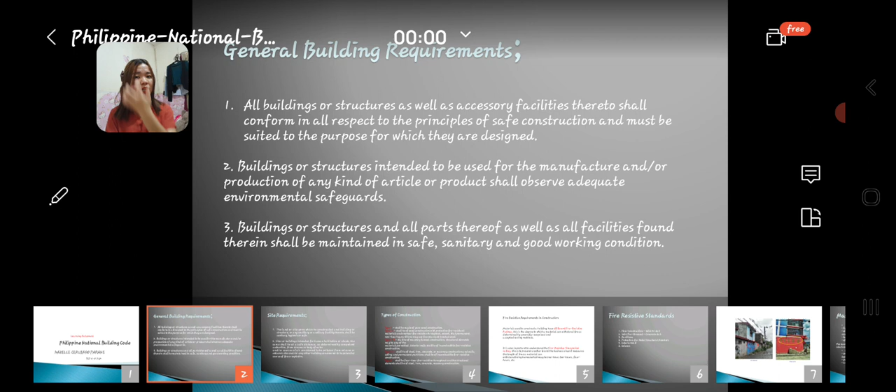Next is site requirements. Sa site requirements, dito pag-uusapan yung lupa na pagtatayuan ng isang building. The land or site upon which is constructed the building or structure or any ancillary or auxiliary facilities thereto shall be sanitary, hygienic, or safe. So dapat yung land or yung site niya is safe and naka-sanitary siya.

Sites for buildings intended for human habitation or abode shall be at a safe distance, as determined by competent authorities, from streams, body of water, or sources of air pollution, or from volcanoes or volcanic sites or any other building considered to be a potential source of fire or explosion.

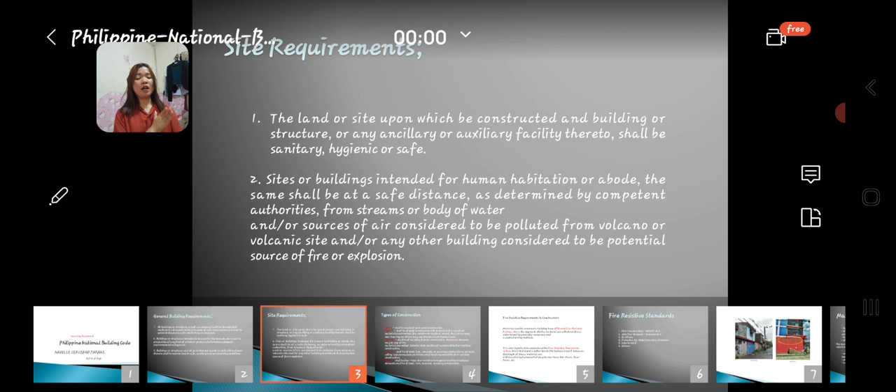So dapat yung magiging land mo or pagtatayuan mo ng isang building dapat ay malayo siya sa disgrasya, halimbawa, hindi siya dapat sa isang lugar na pag lumindol ay magbibiyak yung lupa. So dapat is safe talaga siya at maayos.

Next is types of construction. May type nga ang construction. Type 1 shall be made from pure wood construction. Kasi pag sinabi natin pure wood, matibay, so matibay talaga siya.

Next shall be wood construction with protective fire-resistant materials and 1-hour fire resistive throughout, except the permanent, non-bearing partition, which may use fire-retardant treated wood.

Next shall be masonry, wood construction. Constructional elements may be any of the materials permitted. Exterior walls will be of incombustible, fire-resistive construction. Next shall be steel, iron, concrete, or any masonry construction; walls, ceiling, or permanent partitions shall be of incombustible or fire-resistive construction. The next shall be 4-hour fire-resistive throughout all structural elements, which shall be steel, iron, concrete, or masonry construction.

Dito, papasok, dapat yung gagamitin mo ay matibay. Hindi pwedeng gumamit ka lang ng isang bagay o gagamitin sa isang building na hindi siya matibay. Dito papasok yung mga masonry, yung iron, yung concrete.

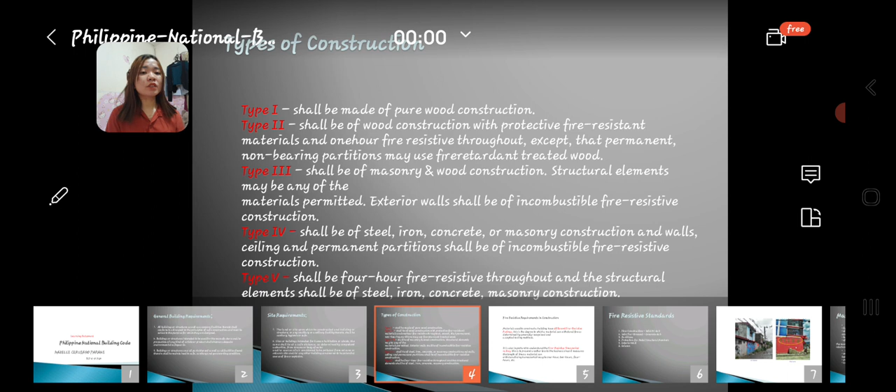Next, fire-resistive requirements in construction. Materials used in constructing buildings have different fire-resistive ratings. This is the degree to which a material can withstand fire, as determined by generally recognized and accepted testing methods.

Dito papasok yung tinatawag na different fire-resistive ratings. Dito mo ma-determine o makikita o ma-recognize kung gaano ba talaga ka-accept yung isang bagay na gagamitin mo. So it means meron siyang tinatawag na accepted testing, ito-testing mo muna yung isang gagamitin mo kung matibay talaga siya.

Next, it is also important to understand the fire-resistive time period rating. This is to prevent further loss to the business since it measures the length of time a material can withstand being burned, by 1 hour, 2 hours, 4 hours, or etc.

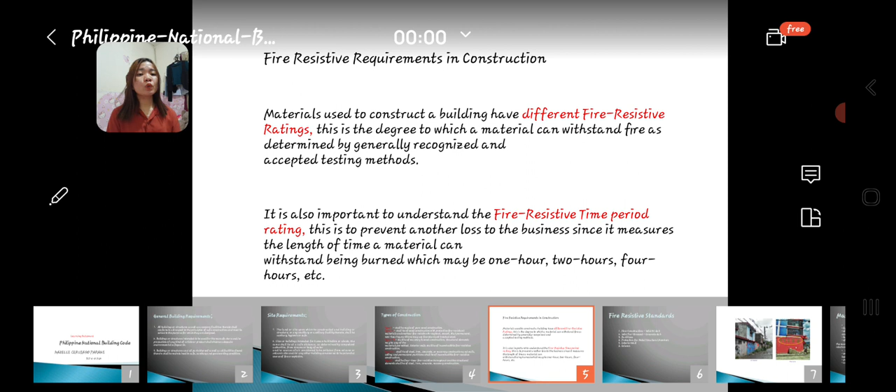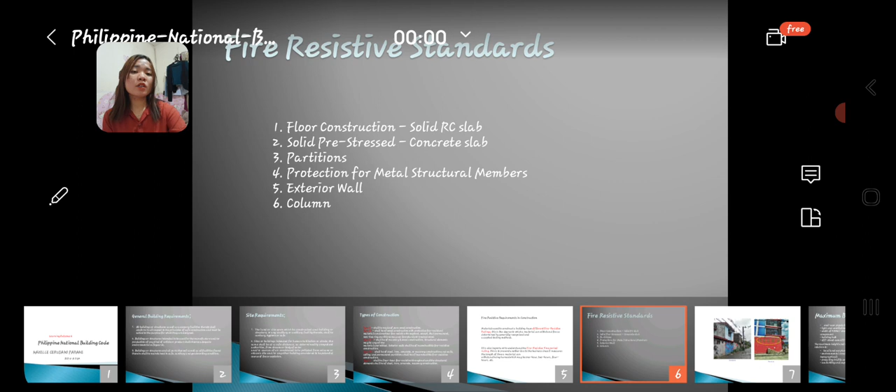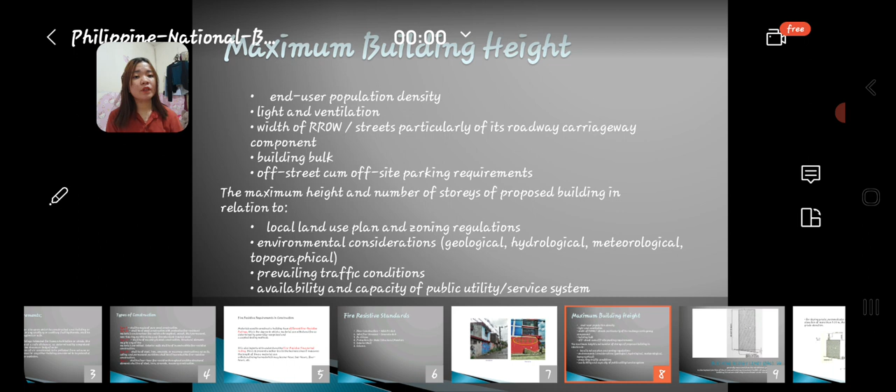For example, the building height limit. Next, for example, for sloping grade perpendicular to RROW with the difference in elevation of more than 3.00 m and the average grade level established grade elevation.

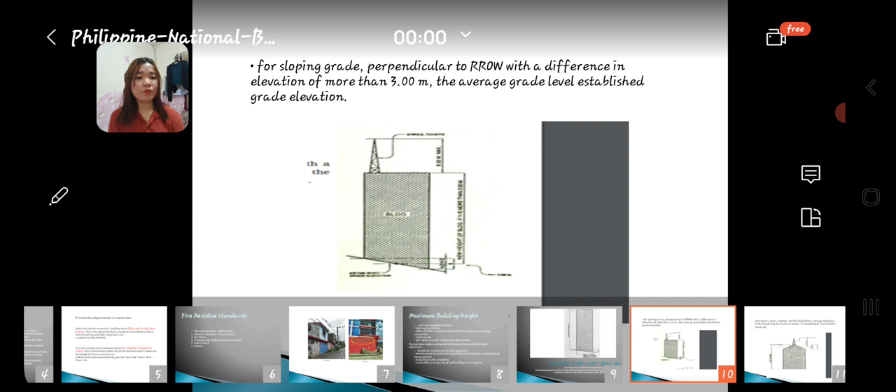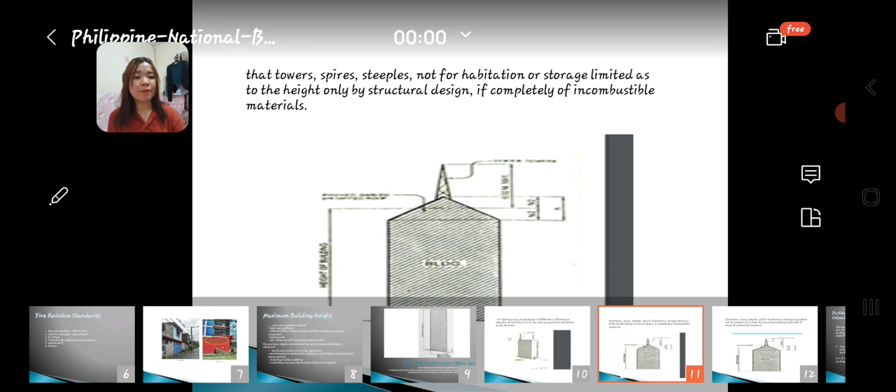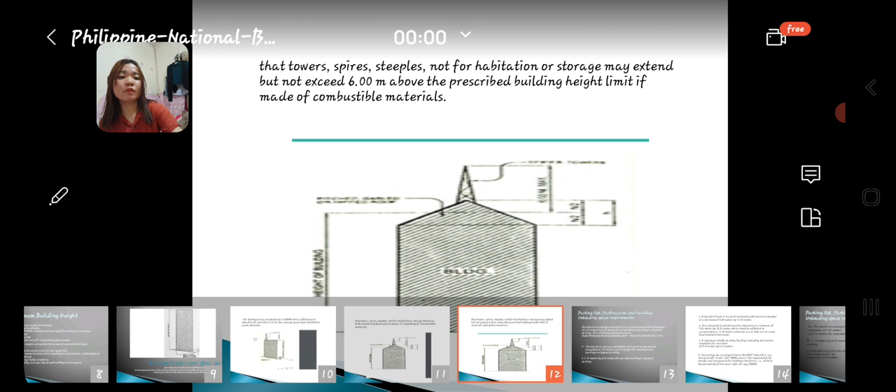Our next is the parking slot, parking area, and loading and unloading space requirements. So of course, if you're really building a building, you should have a parking slot. The size of an average automobile car parking slot must be computed at 2.50 meters by 5 meters for perpendicular parking or diagonal parking. For reference, please check Philippine National Building Code 2005, Rule VII, Section 707, 4-b.

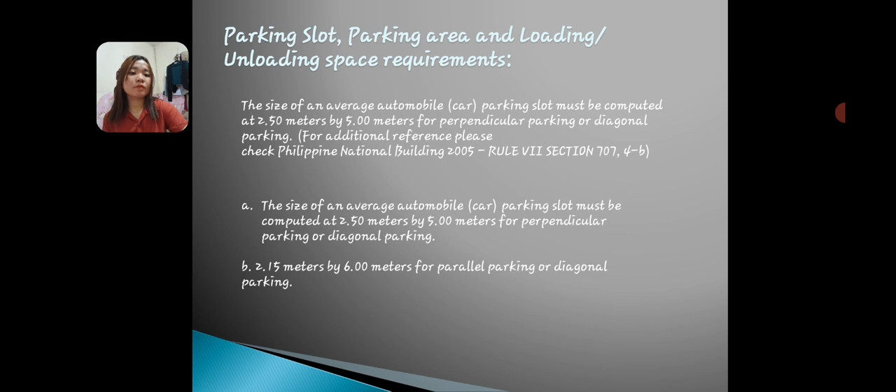Next is standard truck space parking loading slot must be computed at a minimum 3.6 meters by 12 meters. That's the standard for trucks. An articulated truck slot must be computed at a minimum 3.6 meters by 18 meters, which should be sufficient to accommodate a 12 meter container van or bulk carrier at full length. So it's not consistent when it comes to the meters.

When we talk about jeepney or shuttle parking, loading and unloading must be computed at a minimum of 3 meters by 9 meters. So each vehicle type has its own measurement.

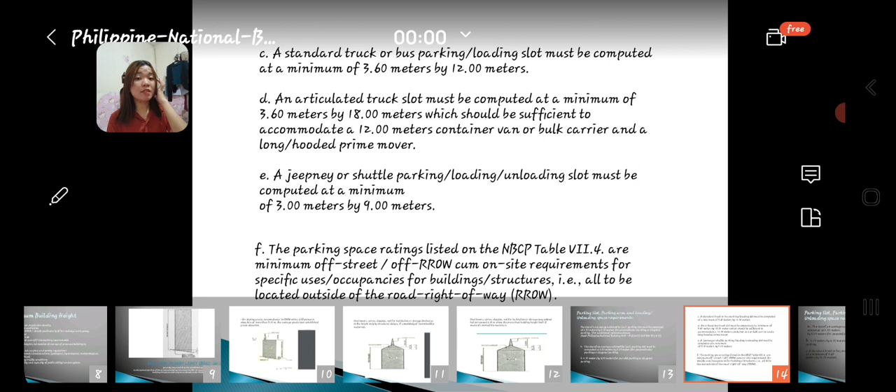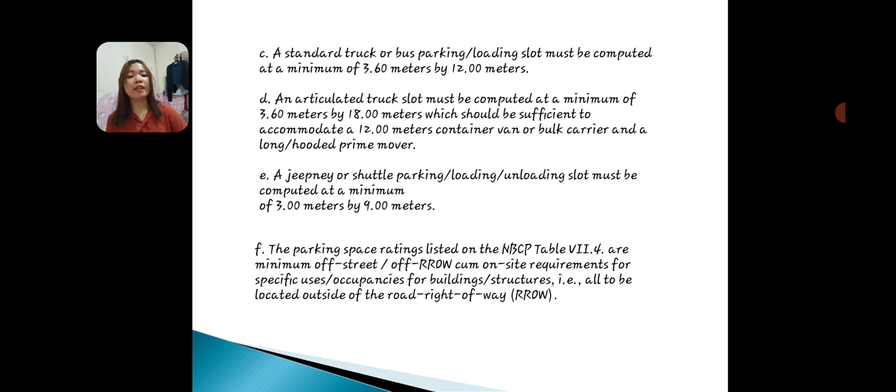F is parking space ratings listed at NBCP Table VII.4. Parking space ratings listed at NBCP Table VII.4 are minimum off-street off-RROW cum on-site requirements for specific uses, occupancies, and building structures, all located outside of the road right of way. Parking slot, parking area, and loading unloading space requirements, so it has its own requirements.

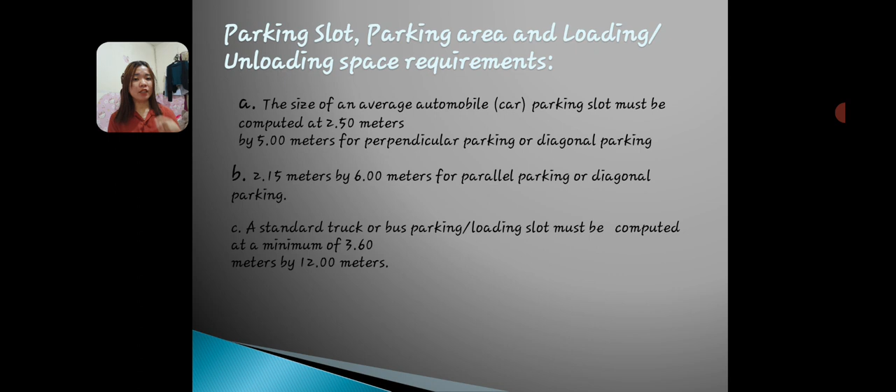Next. That's it as well. So, minimum required off-street off-RROW cum on-site parking slot, parking area, loading and unloading space requirements by allowed use occupancy. There's a measurement for every 1,000 square meters of gross floor area: provide 1 car slot. So it's explained here that for every 1,000 square meters, there's 1 car slot, or 1 bus if it's only 100.

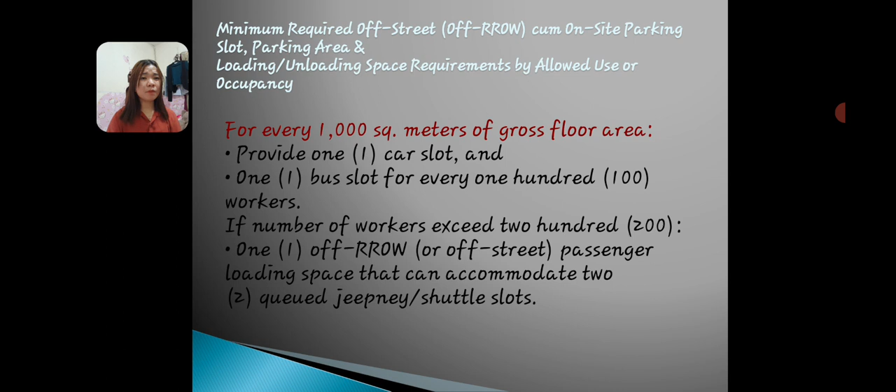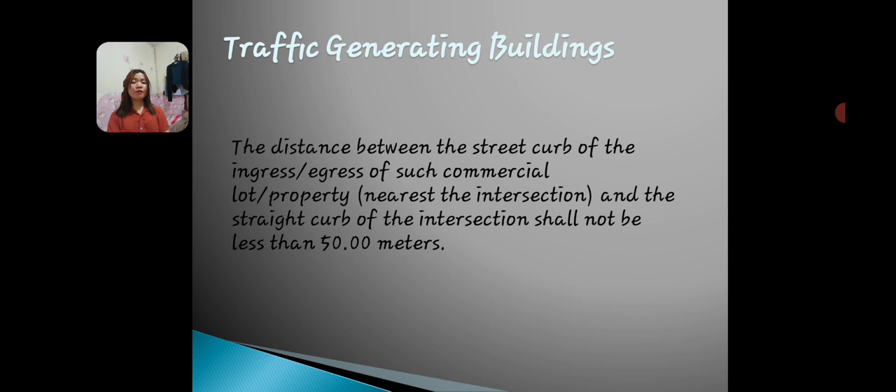Next is traffic generating buildings. The distance between the street curb of the egress of the commercial lot property nearest intersection and the street curb of the intersection should not be less than 50 meters. That's about traffic, so that's the example for it.

Next is light and ventilation. Kung meron tayong tinatawag na light and ventilation: no building shall be altered or arranged so as to reduce the size of any room or the relative area of windows to less than that provided for buildings under this rule, or to create an additional room, unless the additional room conforms to the requirements of the rule.

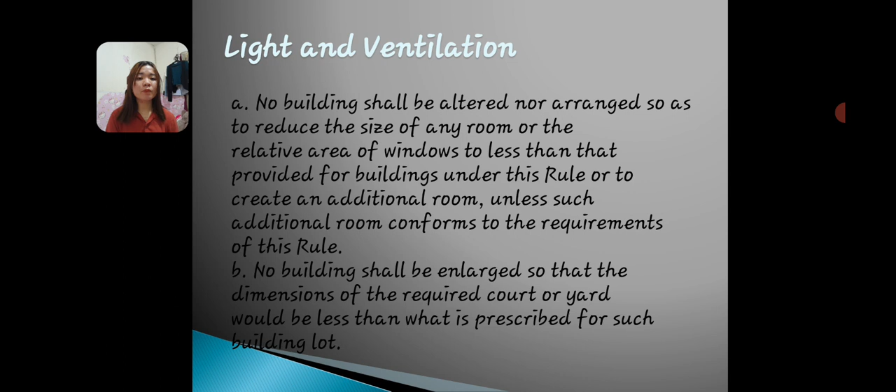So kapag sinabi natin light and ventilation, may room din, pasok din siya sa rules. No building shall be enlarged so that the dimension of the required court or yard will be less than the prescribed minimum for a building lot.

Next is size and dimensions, so may size and dimension din siya. Dito papasok yung minimum size of courts and yards, at ang kanilang least dimension shall be governed by the use, type of construction, and the height of the building, provided that the minimum horizontal dimension of the said court or yard shall not be less than 2 meters.

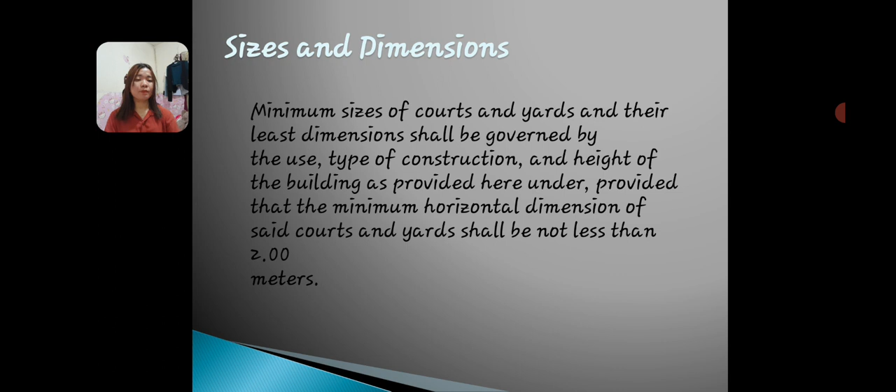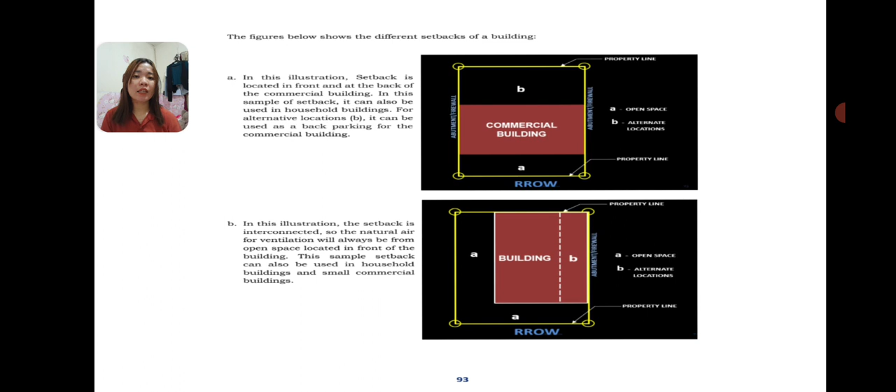Ayan, for example niya. Dito makikita natin yung commercial building. Ito ay nag-iilustrate ng setback na located sa front at sa likod ng commercial building, sample ng setback. Pwede rin itong gamitin bilang household building for alternative location, o magamit bilang back parking for the commercial building.

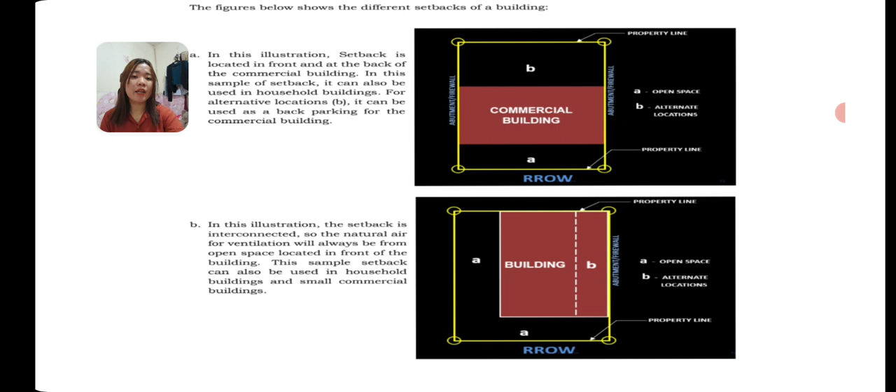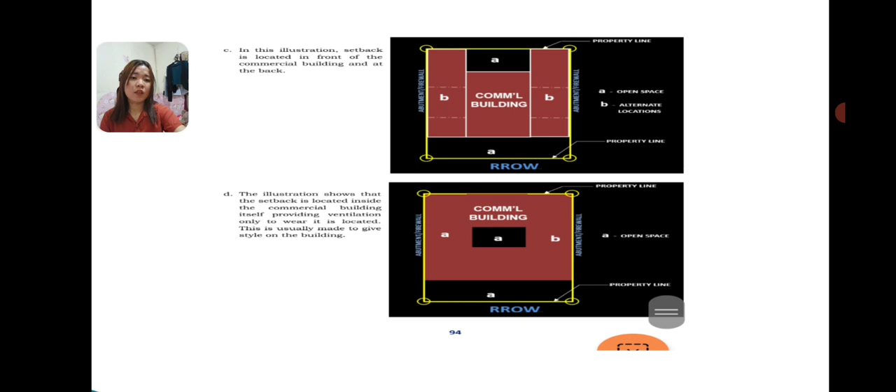Next is setback B, parehas lang din siya. Ang sample setback na ito ay pwede ring gamitin sa household building. Next, ito yung susunod na example, parehas lang din siya, pinaka-example dito yung sa mall, sa mall ng Cubao.

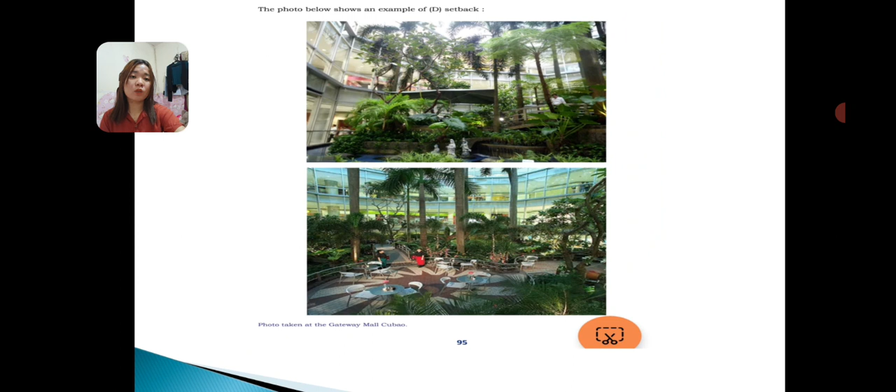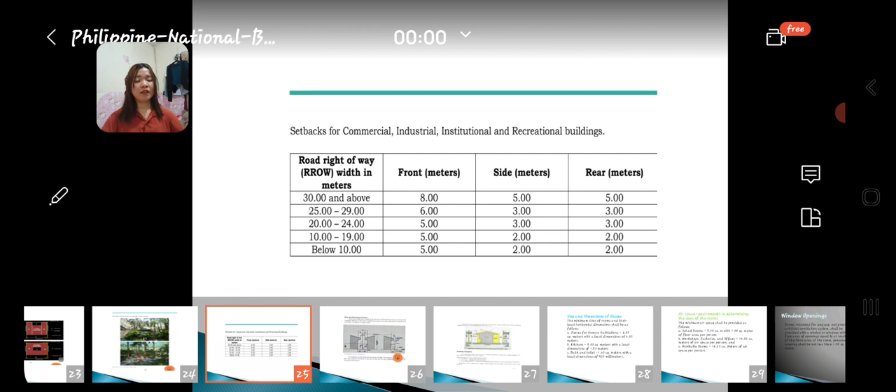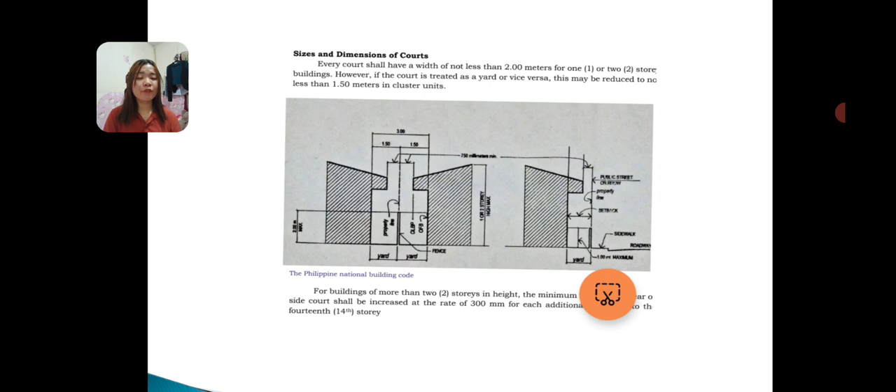Next, for example, size and dimension ng courts. Ito yung example ng dimension courts: every court shall have a width of not less than 2 meters for 1 or 2 story buildings. However, if the court is treated as a yard or vice versa, this means it can be reduced to no less than 1.50 meters for cluster units.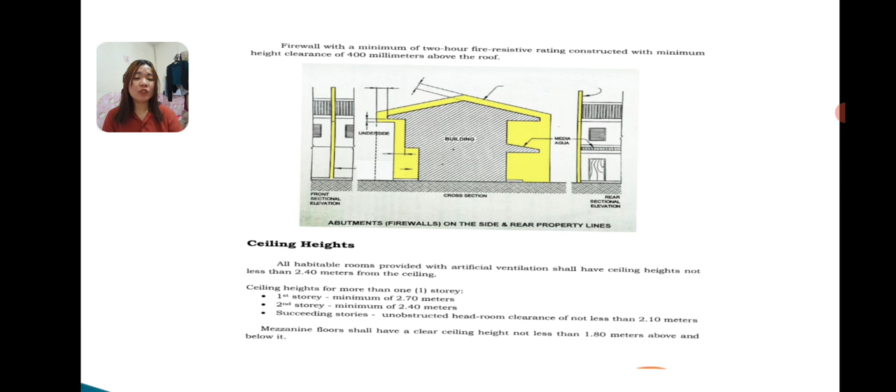Next, ito naman, ceiling heights, kung gaano lang kataas yung ceiling niya. Dito makikita mo, habitable rooms provided with artificial ventilation shall have ceiling heights not less than 2.40 meters. If the ceiling height is more than 1 story, first story minimum 2.70 meters, second story naman minimum 2.40 meters. Succeeding stories naman, unobstructed headroom clearance of not less than 2.10 meters.

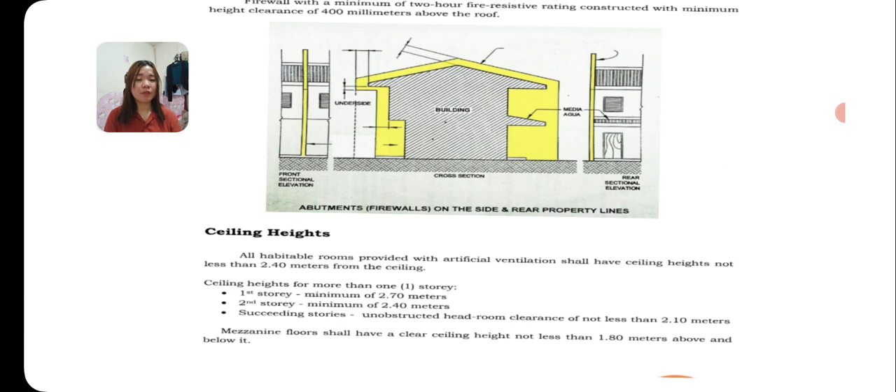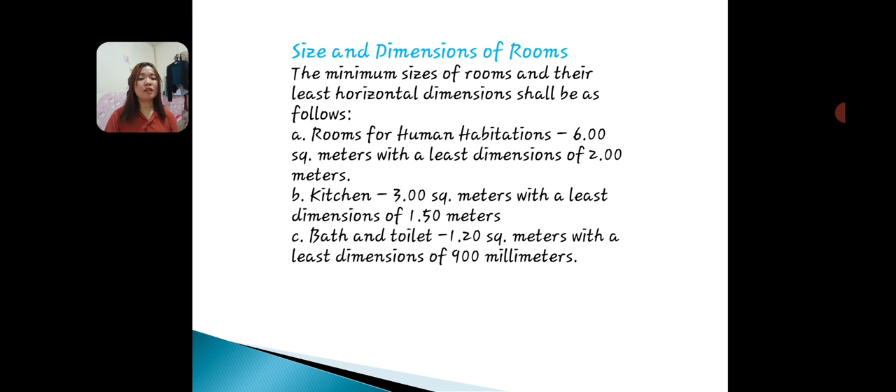Next, may size and dimension of room siya. Minimum size niya, pag human habitation, 6 square meters at least 2.0 meters dimension. Sa kitchen naman, 3 square meters plus least dimension na 1.50 meters. Pero pag sinabi natin bath and toilet, sa toilet naman, 1.20 square meters with a least dimension of 900 millimeters.

Airspace requirements in determining the size of the room. Syempre kailangan natin ito kasi pag walang air o hangin na papasok, ayun tinatawag nilang kulob, parang hirapan kang huminga. The minimum airspace shall be provided as follows.

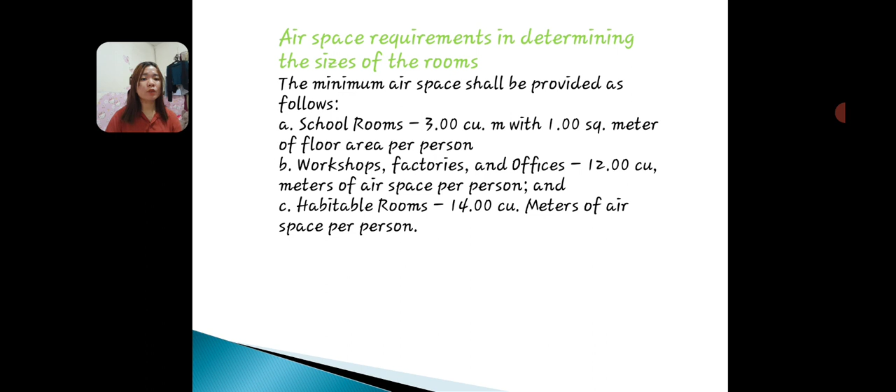School rooms: 1.00 square meters of floor area per person. Workshop naman, pag factories or office: 12.00 cubic meters of airspace per person. Pag sinabi naman natin habitable rooms, 14.00 cubic meters of airspace per person.

Dito, malalaman din natin yung window openings. Di ba akala natin okay na, gawa na lang tayo ng window, okay na ito? Hindi pwede, may sukat din talaga siya sa paggawa ng window. Room intended for use not provided with an artificial ventilation system shall be provided with a window or windows with a total free area of openings equal to not less than 10% of the floor area of the room, provided that the opening shall not be less than 1.0 square meters.

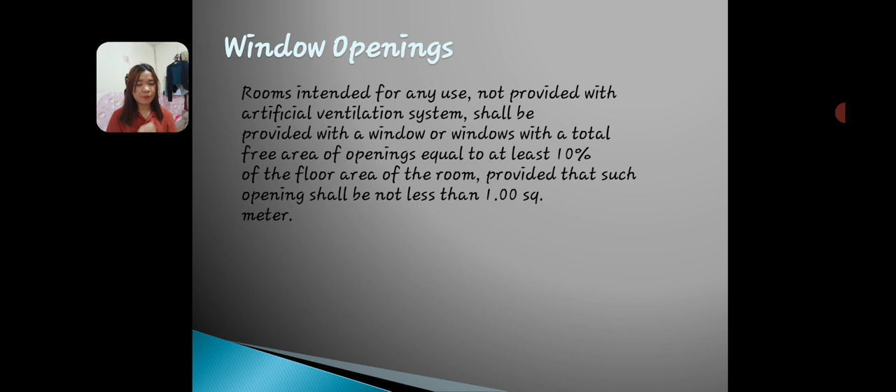At may required siya sa pag-open. Una, tungkol sa courtyard, public street or alley, or open water course, or other public open space, must have a ceiling height not less than 2.0 meters, as one of the sides is 65% open and unobstructed. And that's all, thank you so much for listening.